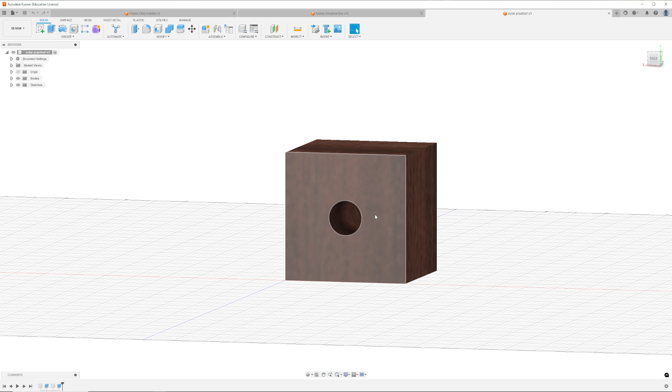Hi everyone, welcome back to another Fusion 360 tutorial video, and say hi to our practice cube. He's coming back for another video, this time talking about dimensions.

Now if you watched the other video where I showed you how to measure things using Fusion Team, that's great for collaboration, but it's not the official way to show dimensions in Fusion 360. Actually, what you need to do is create a design drawing. So to do that, we're going to go up to the top left, where there's a little page with an arrow key. And then from here, we're going to go to New Drawing, and we're going to choose From Design.

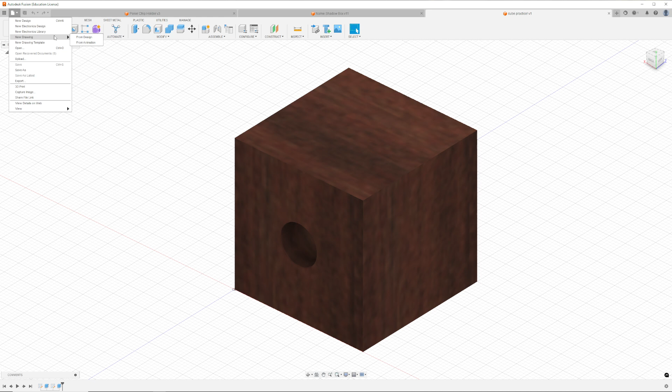And then we can choose a few different options on the right-hand side. First of all, whether you want it to be portrait or landscape. Second of all, which standard you want the design to be measured in. You have two options, ISO, which is the international standard, and ASME, which is the American standard. Now, American standard would have the 8.5 by 11 pages that we happen to use in Canada. So if you plan on printing this out for reference, you'll probably want to stick to the ASME standard, but it's kind of dependent on the assignment and sometimes on your personal preference.

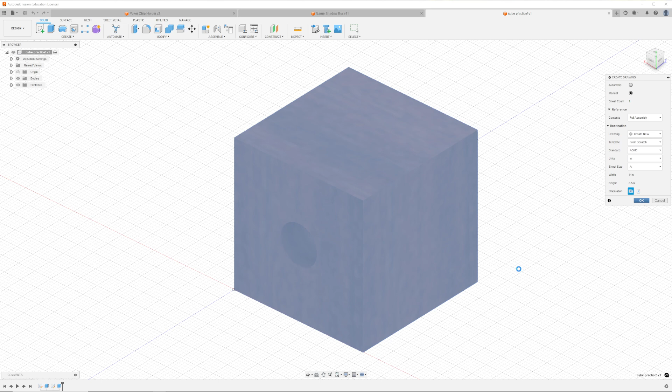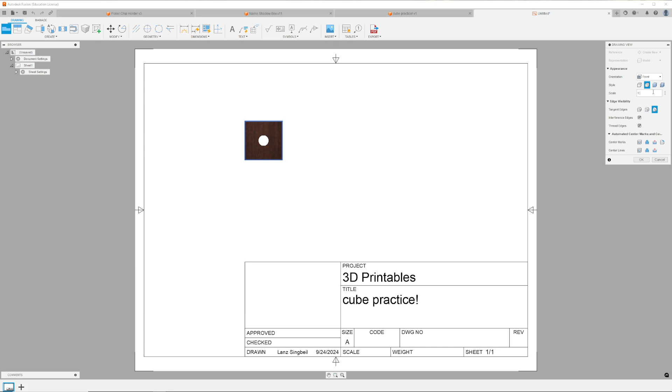Now, once you've decided those things, press OK, and it's going to open up another window. And in that window, it's going to ask us to place the first view. So this is called the base view. Somewhere around here, we have to click, and once we click it, we have our base view. And then we can choose our scale for this view. Because it's such a small cube, we want to fill the page. So we can do 1:1, or maybe even 2:1 as our scale. I'll keep it to 1:1 for now, just to keep it more simple. But depending on the size of the object, you'll want to choose a scale that's appropriate.

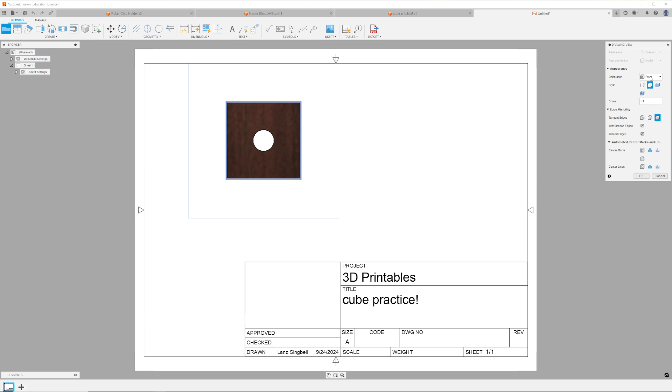The other thing is, you're going to want to choose a view type. You have options between visible edges, visible and hidden edges, shaded, and then shaded with hidden edges. Those are all options, but by default it selects this, which is great, visible with hidden edges. And then the view angle. So we're going to choose the front view as our main view. Then we're going to press OK. Now it's created our first view, which you can move around.

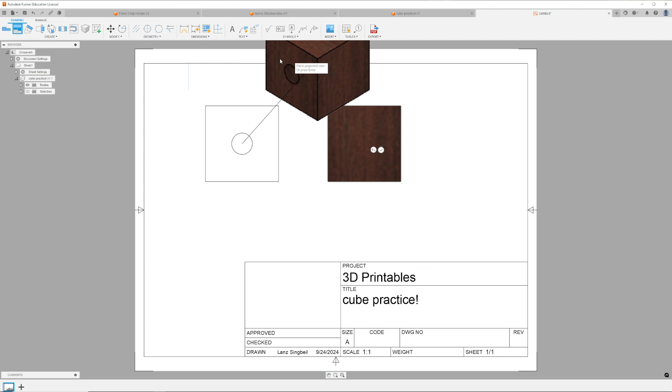Then, from here, we're going to create another projected view. So we go over to the top left and we choose projected view. We click, and now it's going to create a projected view to the right side. And you can see as I move my mouse, I can actually choose different angles. So if I wanted an isometric view, I could project it up here and check the box. Then I can always move my views around. So I can move this, get my isometric view in there, so I can get things into position.

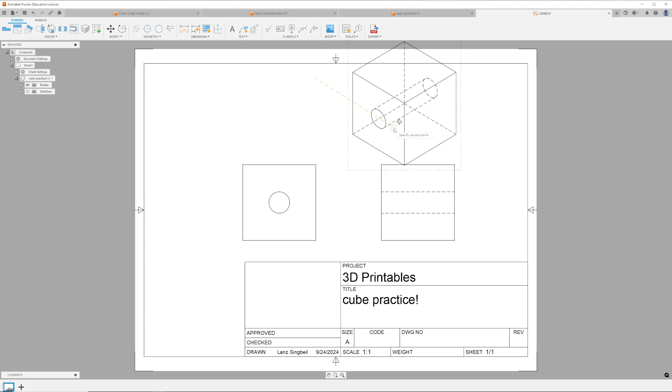If I wanted to have an isometric view like this, I have my two standard views and an isometric view kind of off to the side. That might be good for this. You can also try to put the isometric more in the corner. Another typical way would be to have it in the top right. That's the standard position for an isometric view. But these days, people are a little bit more flexible with how they arrange their views, especially with the rise of digital tools and no longer a need to make this by hand. I can be a bit more flexible to fill the page how I see fit.

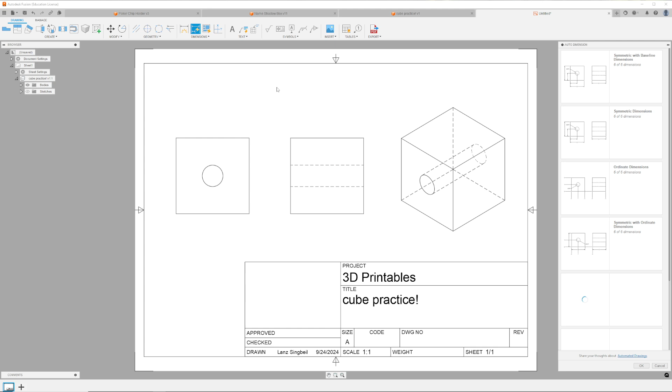Now that I have the views, I can actually go in and add the dimensions. So to add dimensions, I go up to the top and I have these dimensions. And there's even an auto dimension button. If you press auto dimension, it's going to give you what it thinks are the main dimensions that you need. You can choose from a few different options, and you can also choose the density. So you can say less dense, and it's less granular, less information. See how here it's less information again. If you go more, I'm getting more detail, and then the most granular gives me the most detail.

So the auto dimension is pretty great. I can press OK to accept it, but then I can also go in and make changes to these, or I can reposition the dimensions by clicking and then grabbing these dots. That allows me to move the dimensions around. When I have a simple object like this, auto dimension is fantastic. But when I have a more complex object, auto dimension often makes a lot of mistakes. And in that case, you might need to use manual dimensions. So I'm going to show you that.

In the case of a manual dimension, you go to the one that's beside. This is auto dimension. Then you have the manual one here. If I want to dimension something, I can click the edge, and then I click again, and now it's created a new dimension for me. That's basically the main way to do it.

Now, if I wanted to dimension this hole, for example, I could click from here to here, and now that's telling me that this is the height of this hole, which in fact is also the same as this, which they should be the same. That makes sense. So I could decide if I wanted to have it be a diameter or have it set up like this. It makes more sense to represent it as a diameter, so I'm going to delete that one.

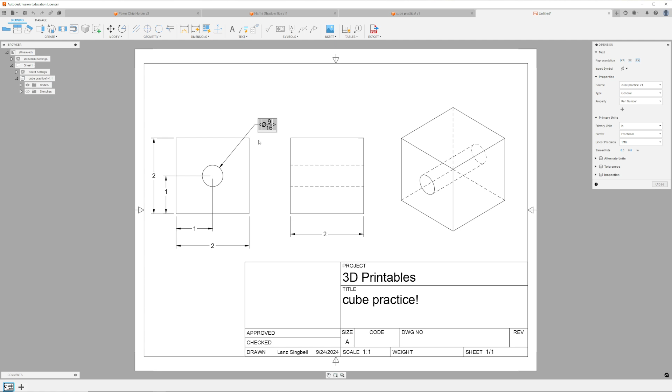So if I go to 16ths, that is the actual accurate dimension, 9/16, rounded to the nearest 16th. And in my class, if you're in my drafting class, I would prefer that you go at the minimum 16th of an inch if you're doing inches, and then 2 decimal places for millimeters when you're giving dimensions.

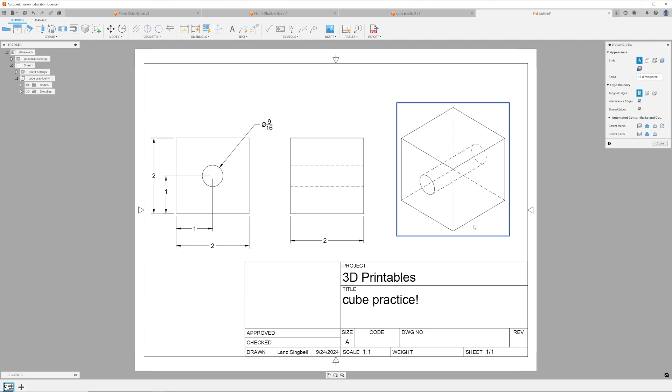Now, I've set this up. I have this arranged the way I like. I've added dimensions the way I like. One thing I could do is double click this view, and I can adjust. Maybe I want to do like a shaded view instead. Maybe I like that. Well, that's cool. I get a different look. Or I could try this shaded with hidden edges, so it shows me how it goes through. That might be a nice appearance for this design.

Another thing that you can adjust in this is you can add other extraneous views. So I could add like a cross section, I could add a perspective view, and all sorts of other types of views. And I'm going to show you some other examples of when those might be useful. For now, this design is done.

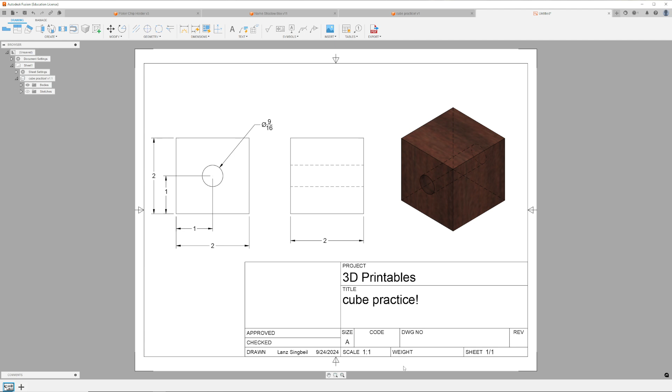So if I wanted to save this, I should also go down here and double check the details here. So in here if you double click, you can change a lot of these things by hand. You can adjust the title, subtitle. The title should always be the name of the object itself. The subtitle would be the name of the assignment.

So this would be My Awesome Cube, and then you have like Cube Practice Assignment, something like that. And then underneath you could have Drafting 12, for example, so that it's very clear what this is for. And if you were needing to submit multiple drawings, you would have to label them. So this is drawing 1 of 1. You might have multiple drawings. If you're told to put a code, then you would put it here.

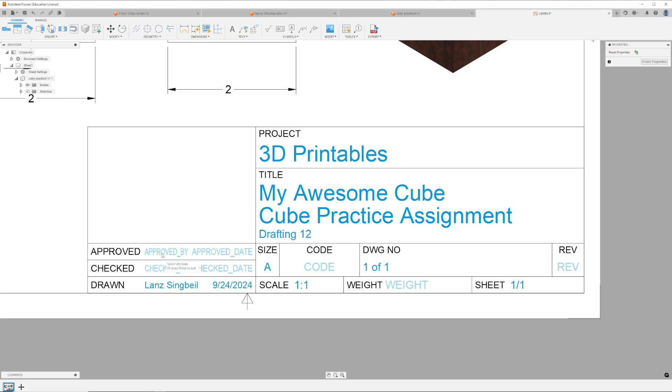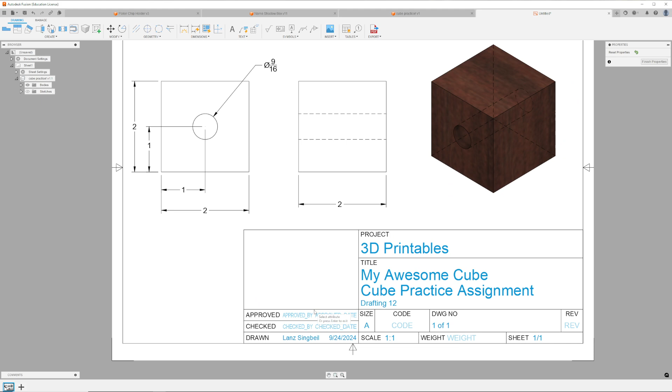And then in the approved and checked, you need to get another student to actually check your work. And you should put their name in the checked by section, okay? And you can leave the approved blank. That would be for me to approve the drawing, but you need to have someone check the work before you submit. So let's say I got Mr. Hamade to check my work, and then I put the date in the same format that I did before. If it was the same date, then you put that in.

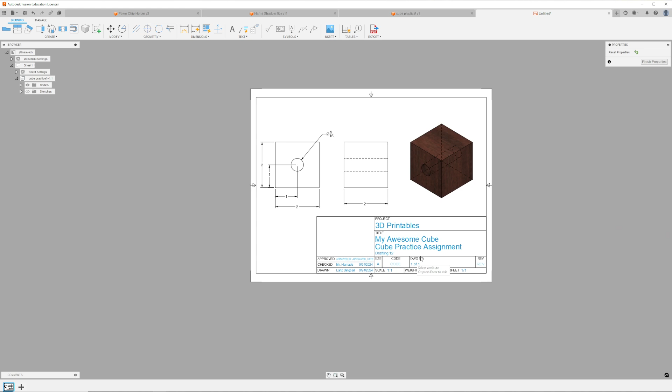Now, in the case of accountability, obviously you could just put a name of any student you wanted, but be aware that I will be checking that so-and-so did actually approve it, especially if there are mistakes. So when you're putting your name down, that means that you've actually gone through and checked that everything lines up, that all the dimensions are correct, that there's no missing dimensions.

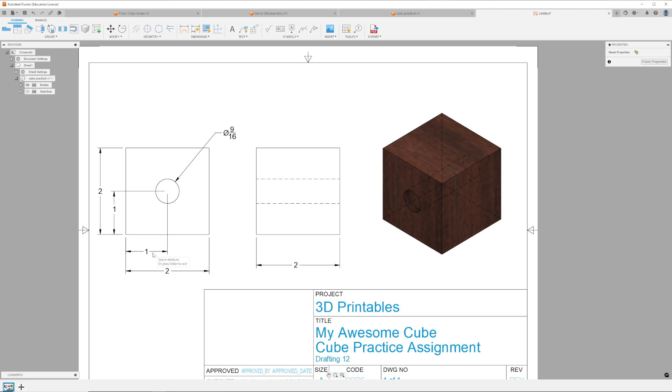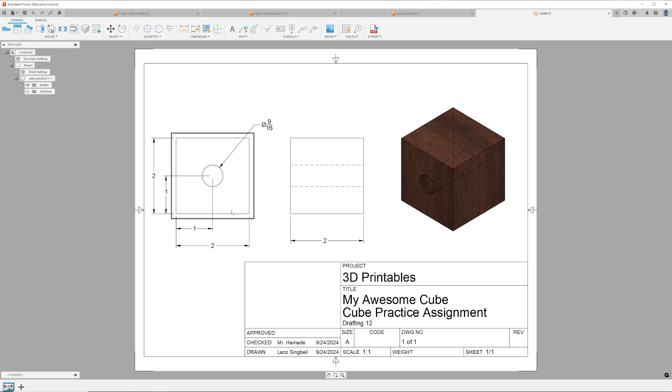For example, I'm going to finish the property so I can go back to editing. What if we didn't have these dimensions? If I just had this dimension and this dimension, right? Well, that's not done. How do I know where this hole is, right? And technically, there's also one other thing missing. I'm going to redo this. There's supposed to be a hole in here.

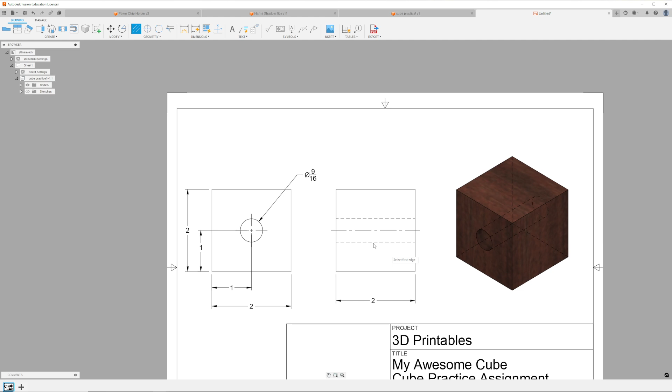And so to mark that it's a hole, I have to use something called a center mark. So here I choose center mark, click here, and now I have the center mark design that shows that's a hole that cuts through. And the other type is a center line. And so I should add a center line from here to here, showing that this goes through. Now I have my center marks and my center lines. This is correctly done, so you would only approve it after that.

Then you save the drawing. It's going to go into the same location as the file is saved. So in this case, I'm going to show you where that gets saved. If you open up here, it's showing that that's located here, okay?

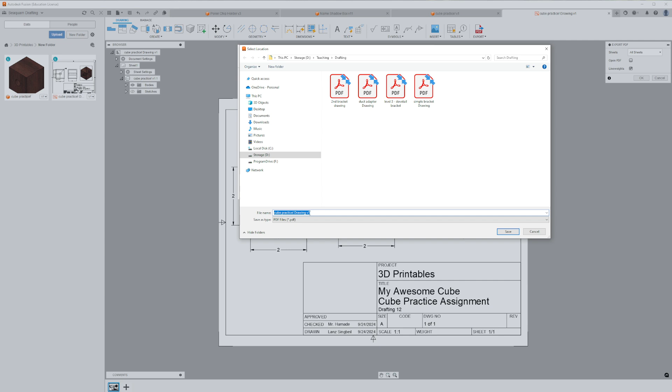And the other thing is, if you want to actually send this or upload it, you can export it as a PDF. So here I can press export, I can choose this sheet, and I press OK. And from there, I choose save to my computer, and I can choose a location. This is how I generated those other drawings that we used. So in this case, I have Cube Practice Drawing V1, and I save it there, and then you can attach that to an assignment.

Now, the last part of this video, that's pretty much it. I just want to show you some more examples. So if you want to stick around for a couple more minutes, I'm going to show you some more examples of other uses or other more advanced techniques, like the cross-section, for example, and more advanced dimensioning.

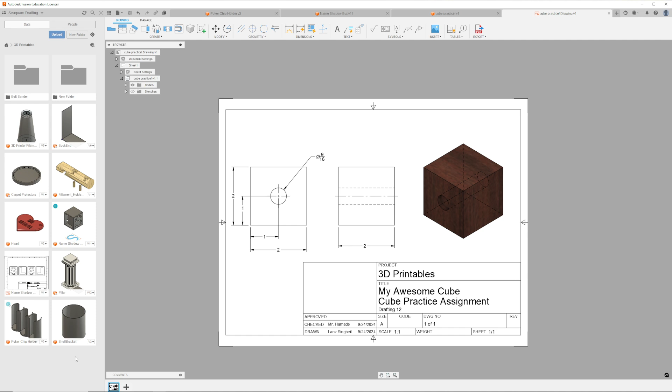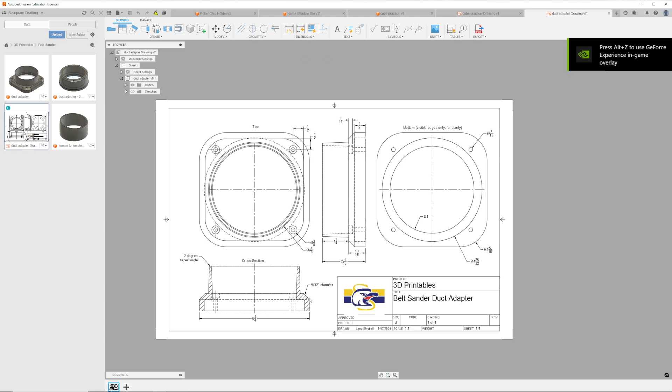So in here, I have a lot of different designs that I've been working on, and one of those is the belt sander that I actually made some brackets for, and that's where one of the design challenges comes from, is this drawing here. So in here, I actually included a cross-section view. So you might notice that it's a bit different than the other views. That's because it actually cuts the model partway through.

So if you look at the design, I wanted to be able to show what it looks like on the inside, which is kind of hard to tell unless you really are looking around. But in a 2D drawing, it's a bit hard to see that. So to make a cross-section, what you do is you create a breakout section view, and then you have to select the view. So I want to select this, and I have to make a profile.

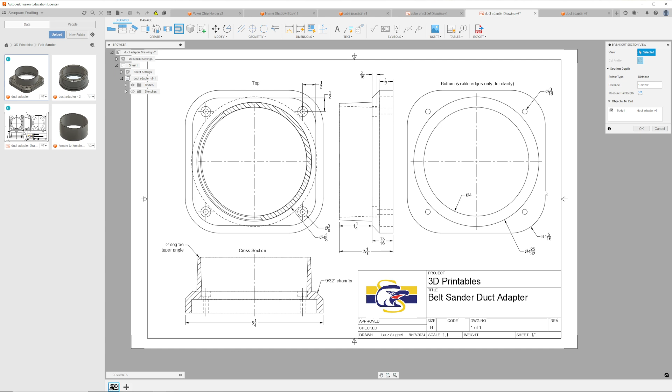So I choose what I want to cut, and then I have to choose the view like that, and then it's creating a cross-section of it. So it's like, how much are you cutting? Basically you start with the thing, you have to make a normal view first. So let's choose this one as an example. I need to pick something that's a bit more simple, I guess. Or I could maybe do it over here. Why don't I just recreate what I did here?

So what you do first is, if I want to make a cross-section, first I have to create a projected view. So I go here, I check that off. Then I have to create my breakout section view from this, and then I have to make a profile from here, and I click, and I click, and I click, and I click it around until I make sure I have it all selected and press check mark.

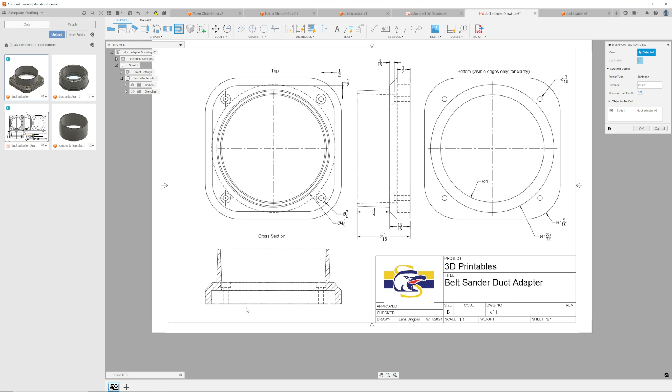And now I've created a cross-section of this, and then I can choose the depth that I want to cut in as well. So I can choose how deep I'm going. So right now I'm going 2 5/8 inches in, which is approximately halfway. And I know it's a cross-section because I can see these hatched lines. Now, not every design requires a cross-section, but designs that are more complicated, where they have geometry on the inside and on the outside, do require cross-sections. So that's one type of view that you can make.

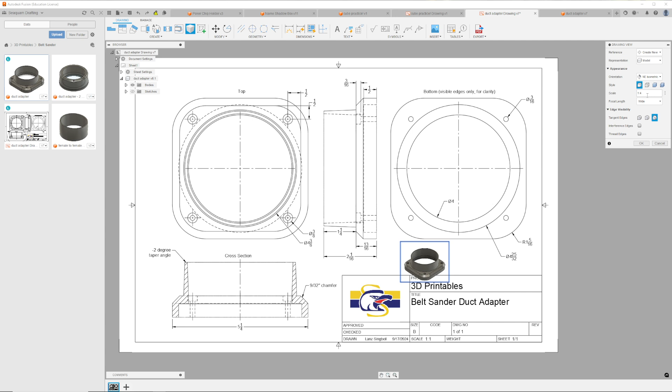Another type of view that's useful, so I'm going to undo my changes so I don't lose them all. Another type of view that's useful is a perspective view. So you can create a perspective view anywhere you like, and then you choose the angle. So I can choose an isometric, or if I want to go like this, and then I can change the focal length to a wide focal length, and then I can change this to 1:1, for example, so you see it better. So this is giving me a different sort of angle, more like what it looks like in the actual design.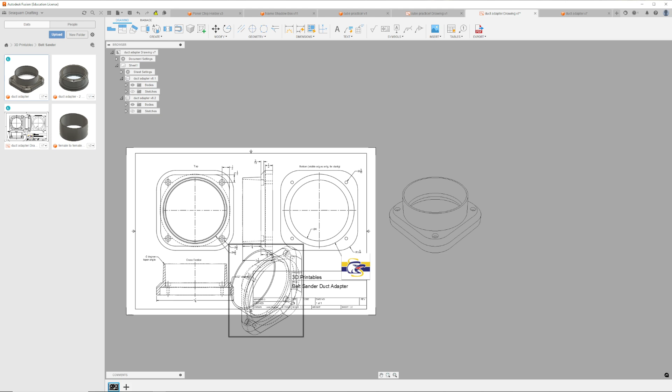I'll put the isometric side by side so you can have a comparison. The isometric, if I create a projected view like this, I'm trying to get it to show the exact same, oops. An isometric view, I'm going to try to get this to be at the same angle, and we'll do the same lines. I can't change the angle as easily. But you can see that in the isometric, the lines are straight. So these lines and these lines are straight, but on the perspective view, none of the lines are straight. I can also change these to both be solid if I wanted to.

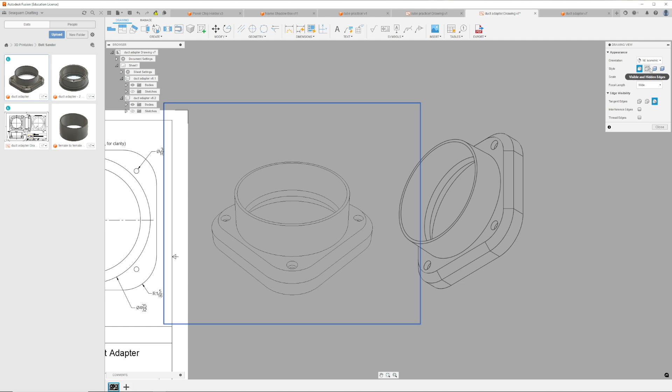Basically, a perspective view gives you the most realistic looking angle, so it's nice for creating a finished looking model. But isometric is a little bit more precise in terms of what it might be.

Oh, I'm getting some security alerts. Uh-oh. It doesn't like that. Did I crash it? We'll see. Anyway, I think that's enough for today, since I somehow crashed Fusion 360. So that's another rule of always making sure you save your work.

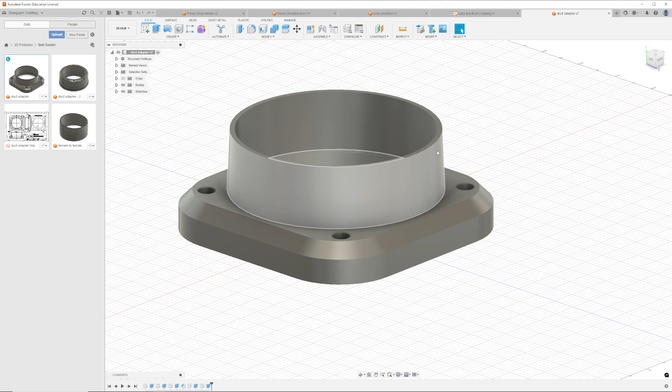And with that, I'll let you try out making a drawing of this before you try making a more complex design drawing. Good luck, and catch you on the next one.